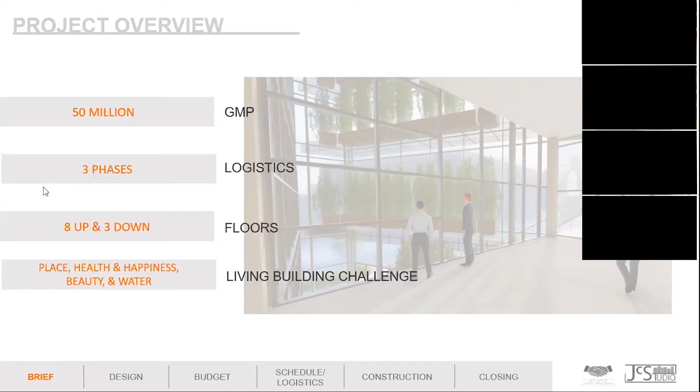The floors, as I said earlier, are 8 up and 3 down. The 3 subgrade floors are all going to be a concrete parking structure. Above grade, we've got 2 floors fully built out with restaurants, a gym, and a couple other tenants, and then floors 3 through 7 are all going to be core and shell, as well as a rooftop restaurant. We do meet the requirements necessary to meet the Living Building Challenge as well.

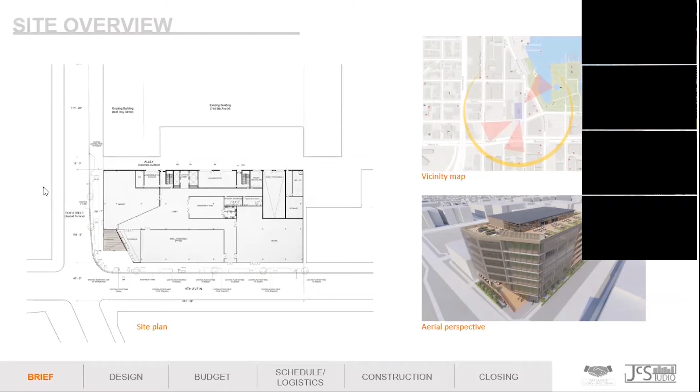So the Catalyst site is located on the corner of Roy Street and 9th Ave in the up-and-coming South Lake Union district of Seattle. Site conditions were heavily factored into design to create a sense of belonging in this part of town. Discovering important views from the site determined the different building focal points, and using the sun path determined placement of shading on the necessary facades.

Our main design goals were to engage people from the street and sidewalk up and into the building in an inviting way, to create an effective atrium with multiple purposes, utilizing rainwater collection from the roof and sidewalk bioswales recycled back into the building, maximizing the views toward Lake Union by angling the east facade, and designing a unique south facade that also helps increase sunshade.

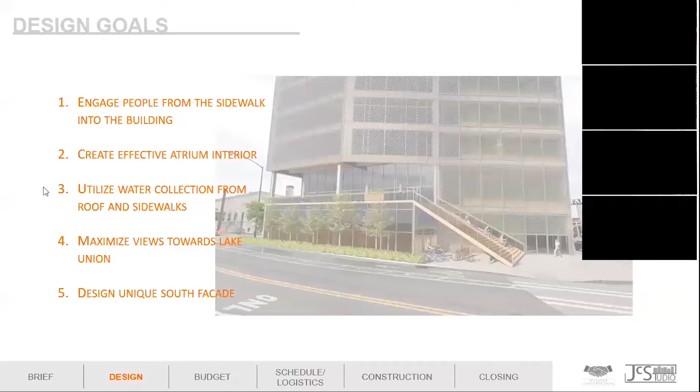So our first main design focus was to immediately engage users when they enter the building. Opening up the main entrance on the street corner creates a recognizable access point and an open meeting area. Offering different ways to enter the building allows for a more interesting user experience. The first main entrance is through the 7-story atrium that doubles as the main vestibule before entering the lobby.

While in this atrium, you can immediately see the harvestable vegetation that grows along the fritted glass facade up until the 7th floor. The second main way of entering the building is up the exterior staircase that leads you to the restaurant patio, or into the 2nd-story lobby. This staircase acts as a statement piece while also doubling as a meeting area to visit and relax on the steps while still feeling a part of the building. Finally, the staircase provides ample weather-protected bike rack storage that encourages human-powered living.

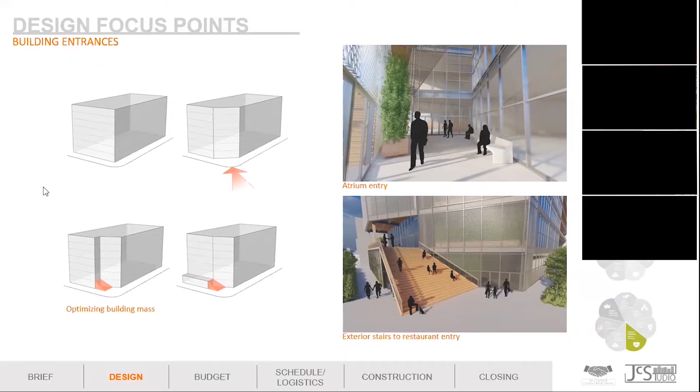Another main design focus was the creation and utilization of the corner atrium. Placing this as a vestibule created a space where people would immediately encounter the plants that can be visually enjoyed at the atrium or harvested and are available for purchase at the first floor market.

In addition to the green wall, making the atrium operable was another design goal to integrate some passive cooling through the stack ventilation system. Incorporating operable openings in the curtain wall between the atrium and the office space allows for hot air to travel up to the atrium vents located at the roof.

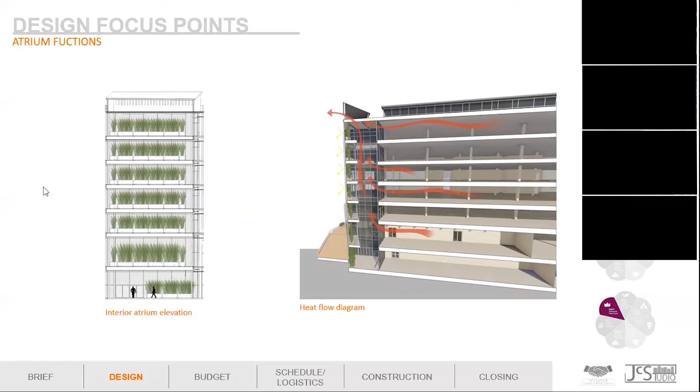One of our main design points is the water petal by incorporating positive water use. We incorporated a rainwater collection system through the rooftop decking that consists of a 6-inch pedestal system where water drainage flows through the irrigation pipes located at the northwest of the building, down to the cistern and filtration system located in parking 3 for all building water collection and recycling. Rainwater is then recycled back into the building for the use of plumbing and plant irrigation.

Bioswales are also located along the sidewalk on the east and south side of the building. The bioswales have a drainage course with gently sloped sides to convey stormwater runoff. Rainwater collected in the bioswales is filtered and reused back into the building for plumbing and plant irrigation.

Interior circulation for the first floor is introduced through the atrium located at the bottom of the exterior staircase. The main entrance of the second floor is the exterior staircase located on the southeast of the building, inviting pedestrians to the outdoor restaurant patio viewing downtown Seattle. Multiple entrances are also located along the east and south side of the building. The main circulation can be accessed through the elevator and stairs located in the core of the building.

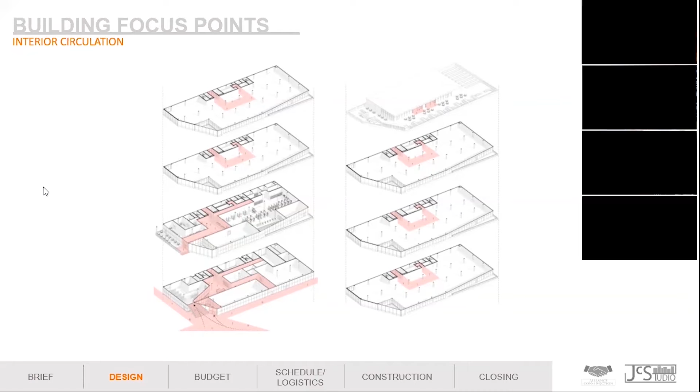So the first floor features a public market, public retail space, and small business leasable space. And our main idea with the first floor was to draw users into the atrium vestibule and bring the users into the center of the building where the community space is located and incorporate retail within the community as well.

So moving up to the second floor, we then have a restaurant with its own outdoor deck, which is covered by floors 3 through 7 above, providing some sun shading for the users out on the deck. The second floor also features a large gym and yoga studio space for the employees of the office space above to utilize during break time or whenever they see fit, as well as more leasable space for small business and private offices. The gym and the yoga studio also have their own outdoor deck, which is a unique opportunity to witness the views of Lake Union.

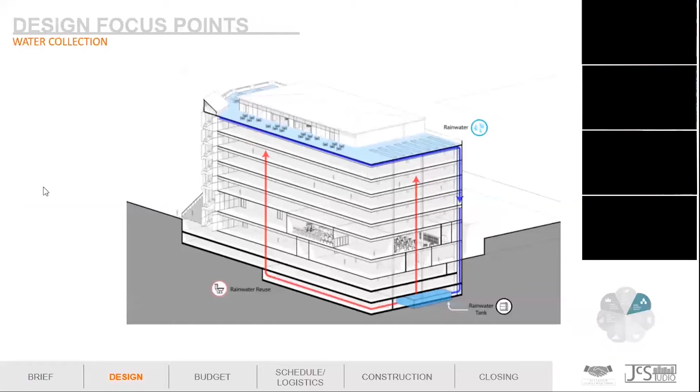Floors 3 through 7 are also left as open office plan that can be customized as Vulcan sees fit. Each of these floors offers a unique view of South Lake Union from their own balconies, where the employees are afforded an opportunity to take a step outside of work and relax and enjoy the views of the city.

Moving up to the rooftop, there's our rooftop bar, which opens up to a large terrace space that offers the users the view of Lake Union as well as back towards the Space Needle and the center of Seattle. The roof space is also filled with greenery that provides the user an immersive experience, and it gives the community the opportunity to witness their produce being grown within the building and then sold down on the first floor market. As Josh mentioned before, all the plants will be utilizing water that is collected on the rooftop and recycled throughout the building.

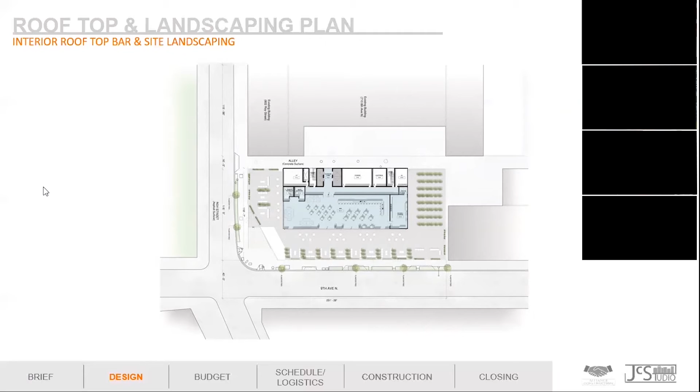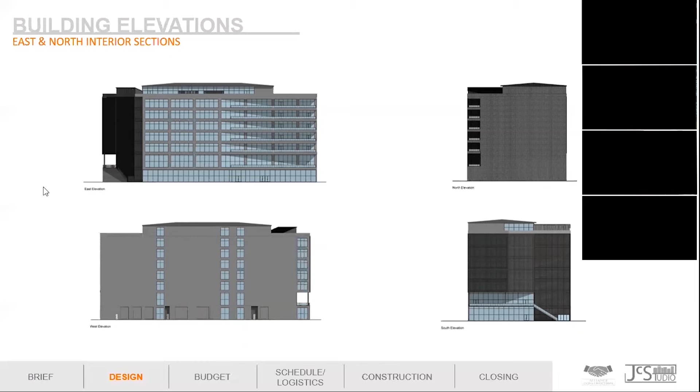On the south elevation, we have a fritted glass that offers sun shading, protecting the plants from overexposure inside the atrium space, as well as protecting the building from excessive heat gain. And then moving over to the renders.

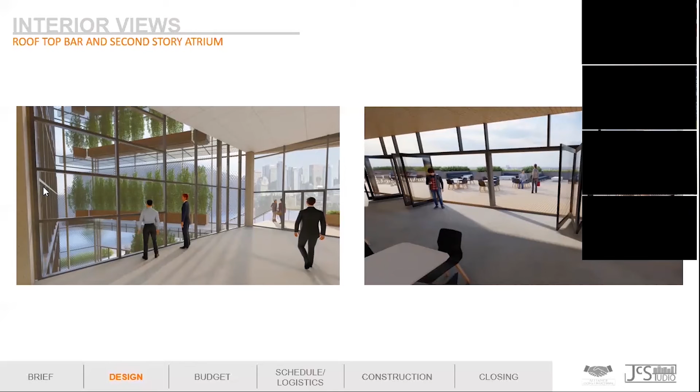On the left-hand side, you can see a shot from our second floor lobby area, where on each floor, the guests are allowed the opportunity to look into the atrium, see those plants and the produce being harvested there, and then you can see the deck leading out towards the restaurant and those exterior stairs. On the right-hand side is a view from the inside of the rooftop bar looking out towards Lake Union.

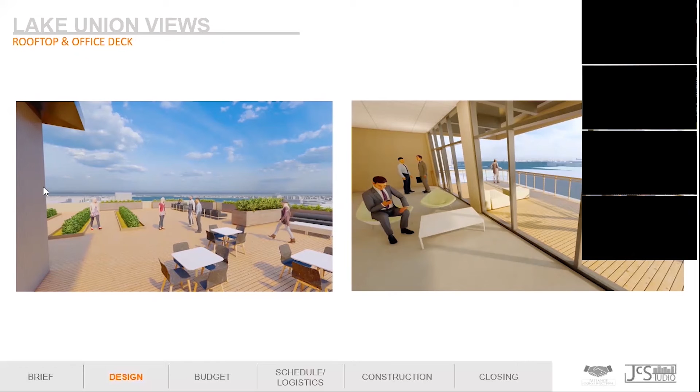Again, on the left, we have the rooftop terrace area looking towards Lake Union. And then on the right is a shot from inside of one of the office floors, where you can see each office floor has its own exterior balcony that allows a chance to re-enter the city and escape the work life a little bit.

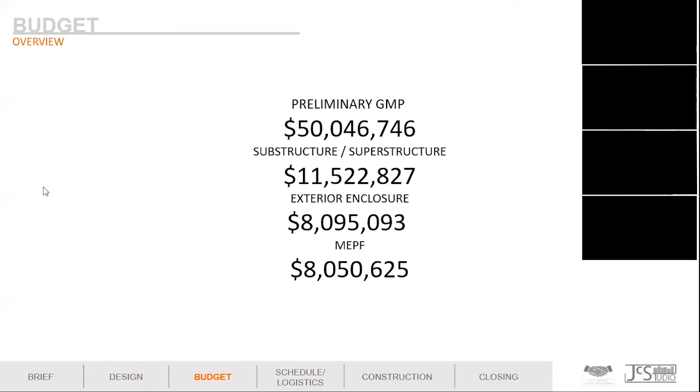All right, so moving on to kind of budgetary items. So our preliminary GMP, as I said before, is going to be just over $50 million. Substructure, we're at about $11.5 million, actually including superstructure. The exterior enclosure itself is just over $8 million. And MEPF together is all just over $8 million as well.

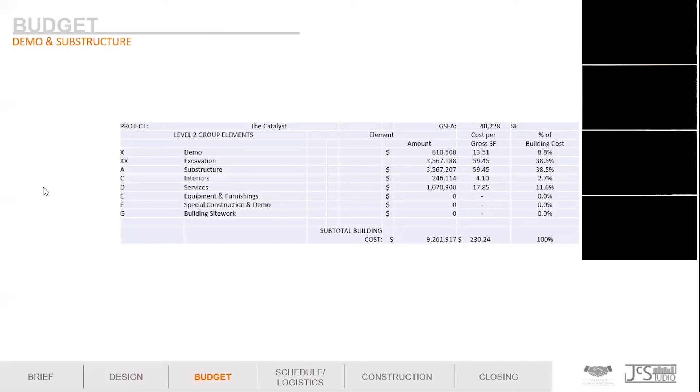Substructure dewatering is going to be kind of an interesting one. We were able to save a little bit of money by pumping our water over into Lake Union. We've got a purification site on site. We can pump the water into those tanks. It'll purify it cleaner than the water that's already in Lake Union. And then we've got the permitting and trucking already lined out so that we can send those trucks over and get everything dumped into the specific port of Lake Union.